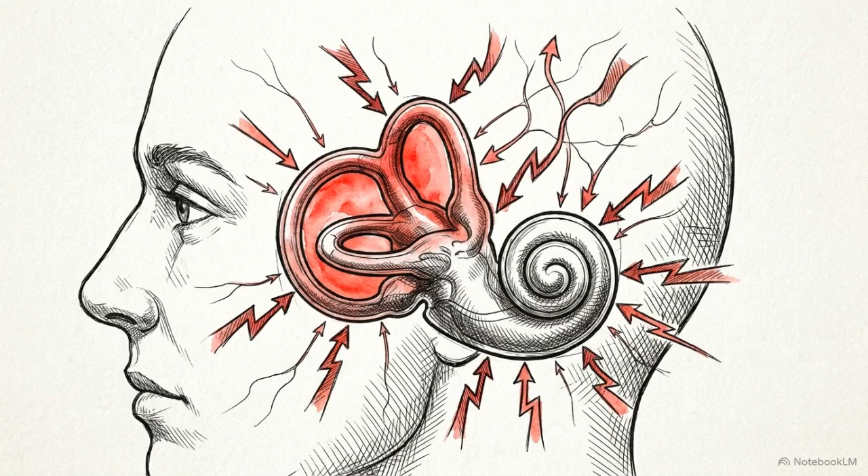Swallowed completely, the pilot is stripped of all external visual data. Without a visible horizon, human physiology fails. The inner ear actively misinterprets the forces of acceleration and gravity, feeding the brain false signals. Relying on physical sensations in this environment guarantees rapid spatial disorientation.

To survive, the pilot must learn to ignore their own vestibular system and reconstruct the exact physical performance of the aircraft purely by reading the instruments inside the cockpit.

Maintaining controlled flight in the clouds relies on three precise mechanical skills: cross-checking the instruments efficiently, interpreting the data, and executing accurate physical control. Achieving this requires dividing the cockpit into two functional categories: control and performance.

These distinct halves are continuously bridged by a rigid visual algorithm known as the basic T. Adhering to this structured framework is the only reliable method to process the relentless stream of cockpit data, keeping the pilot mentally ahead of the airplane and preventing fatal task saturation.

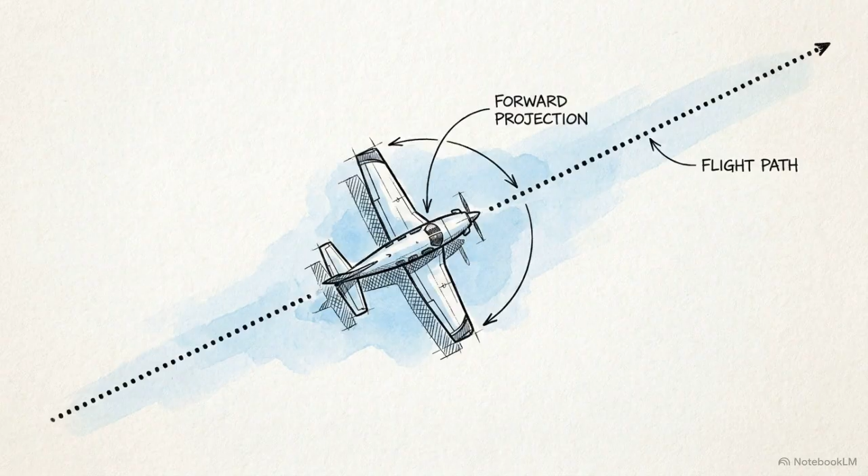Every maneuver an aircraft executes is dictated by a specific physical equation: pitch attitude plus power equals performance. Inside the cockpit, the pilot manages this equation starting with the control instruments. The attitude indicator and the power gauge represent the immediate physical inputs the pilot selects using the control column and the throttle.

Surrounding these primary inputs are the performance instruments: the altimeter, airspeed indicator, vertical speed indicator, and heading indicator. These dials do not change the state of the aircraft. They exist entirely to verify the aerodynamic results of the inputs the pilot just made on the control instruments.

Separating the panel into these specific categories prevents pilots from making the dangerous error of chasing the needles. The procedure is absolute: select the pitch and bank first on the control instruments, wait for the aircraft to react, and then consult the performance instruments to verify the result.

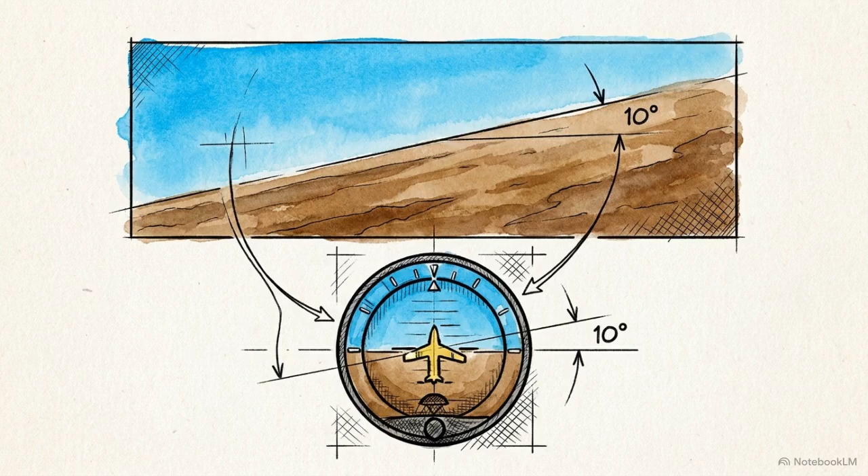At the center of this execution is the attitude indicator, the undisputed master instrument of the cockpit. Because it acts as an immediate, artificial representation of the natural horizon, the pilot must return their eyes to it every few seconds to maintain basic spatial awareness.

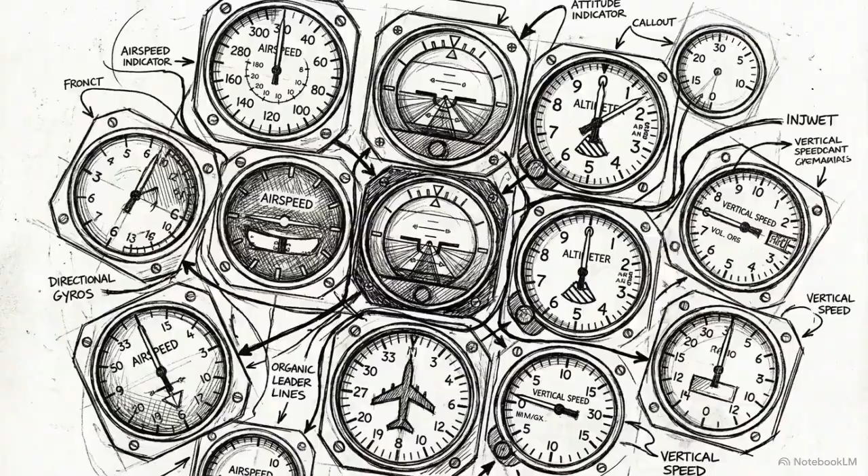However, staring exclusively at the attitude indicator will eventually allow uncorrected altitude and heading drifts. Conversely, looking randomly across the other gauges destroys the pilot's frame of reference. The solution is a disciplined visual routine known as the selective radial scan.

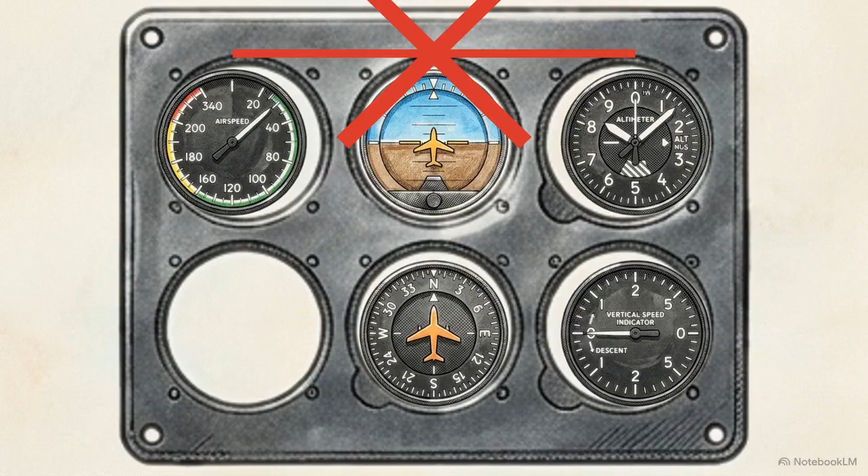The rule is strict: after checking any individual performance instrument, the pilot's eyes must immediately snap back to the master instrument. Scanning directly from the altimeter over to the airspeed indicator bypasses the artificial horizon. Because performance instruments have slight mechanical delays and display completely separate metrics, moving between them without resetting at the center breaks the pilot's spatial model.

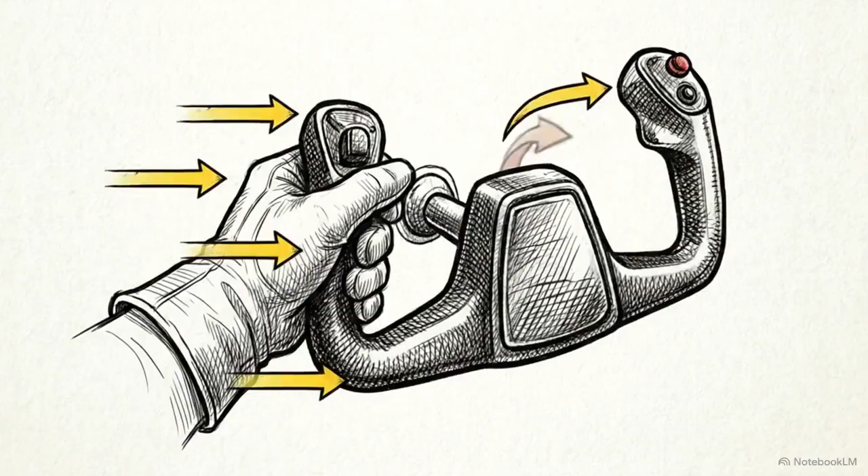The selective radial scan continually re-anchors the pilot. It ensures a constant, reliable baseline of pitch and bank while allowing systematic, rapid sampling of the specific data required to maintain the flight path.

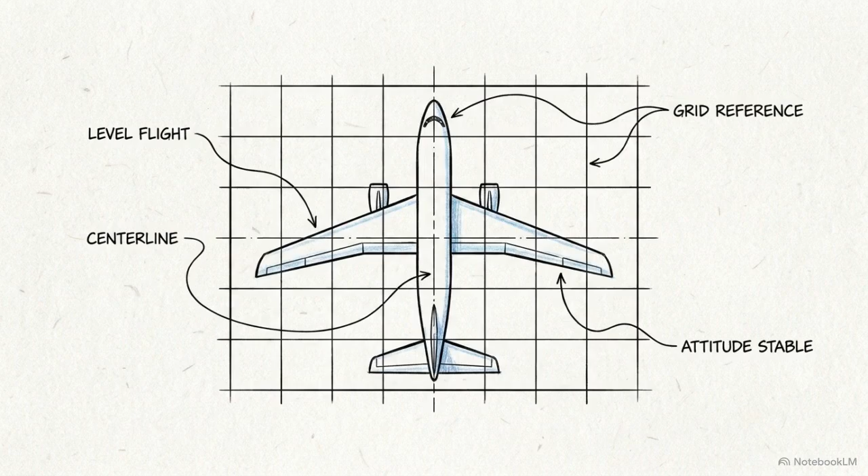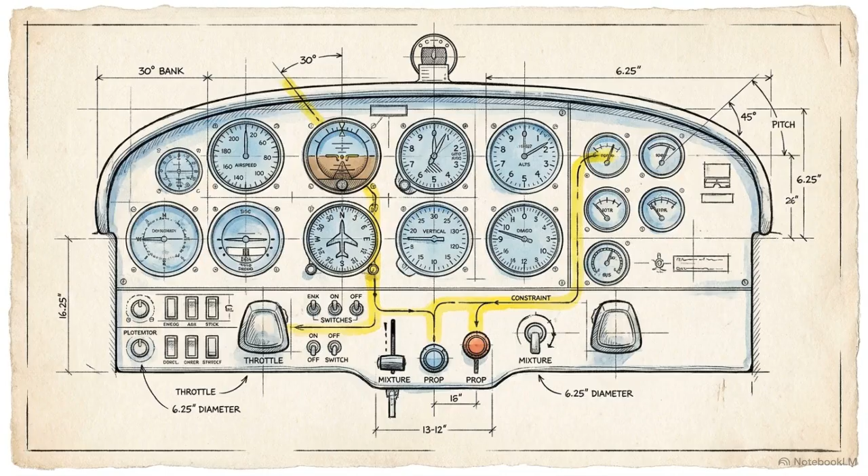This scanning technique was built entirely around the physical six-pack arrangement of traditional analog flight instruments. This specific cluster of gauges was meticulously engineered. The physical layout minimizes eye movement and maximizes the geometric efficiency of the radial scan.

It forms the basic T configuration: airspeed at the top left, the attitude indicator top center, the altimeter top right, and the heading indicator directly below the attitude.

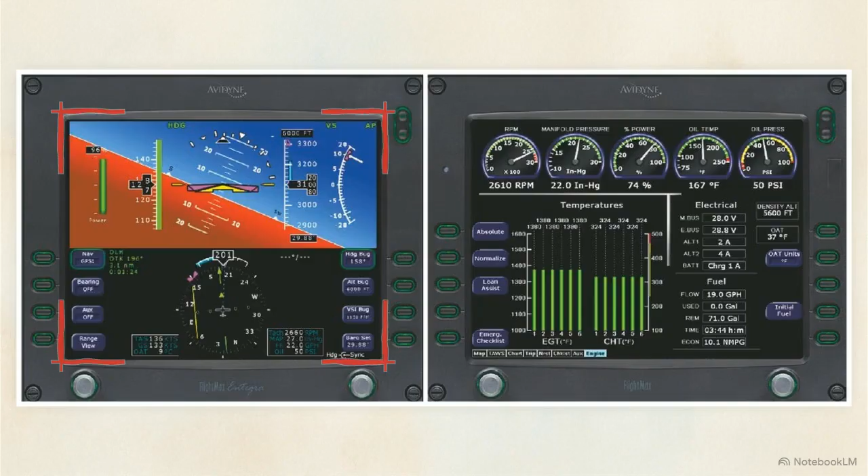Decades later, aviation transitioned to the modern glass cockpit, consolidating this data onto a digital primary flight display. Instead of traditional round dials, the digital screen presents information using vertical tapes for airspeed on the left and altitude on the right. Despite the radical difference in presentation, the digital geometry maps perfectly over the analog six-pack.

The relative positions remain identical, preserving the exact same basic T scanning pattern. The basic T has survived the transition to digital screens because it reflects the optimal mechanical path for human visual processing in the cockpit. While the geometric layout of the basic T is permanent, the pilot's attention is constantly reallocated.

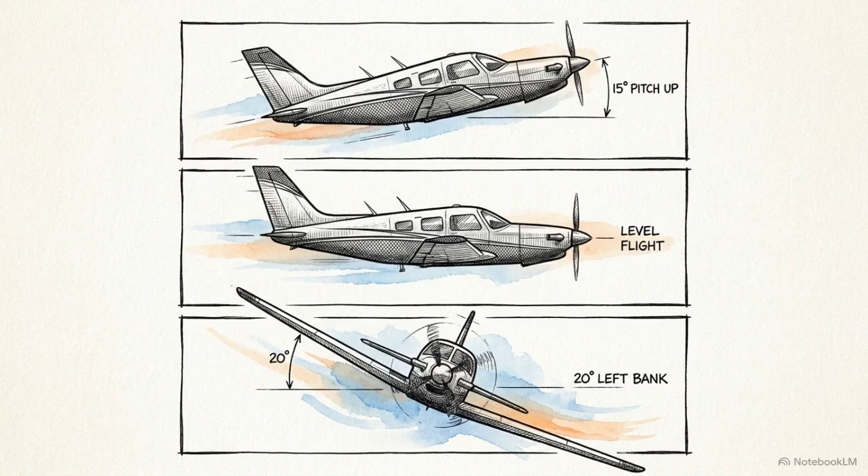The visual scan dynamically shifts priority based on whether the aircraft is climbing, cruising, or turning. During any given maneuver, one specific dial becomes the primary performance guide, the exact instrument that dictates the pilot's next physical control input. Consider the climb.

With the throttle locked at maximum power, the airspeed indicator takes priority. It becomes the primary performance guide used to verify that the pitch attitude is correct. If the airspeed reads too low, the pilot makes a deliberate correction: lower the nose on the attitude indicator, let the aircraft physically settle, and recheck the airspeed.

Once the aircraft levels off into cruise flight, that priority hierarchy instantly shifts. Now, the altimeter takes over as the primary performance guide for pitch control, dictating minute adjustments to the nose to maintain level flight. The airspeed indicator is demoted, functioning solely to dictate adjustments to the throttle.

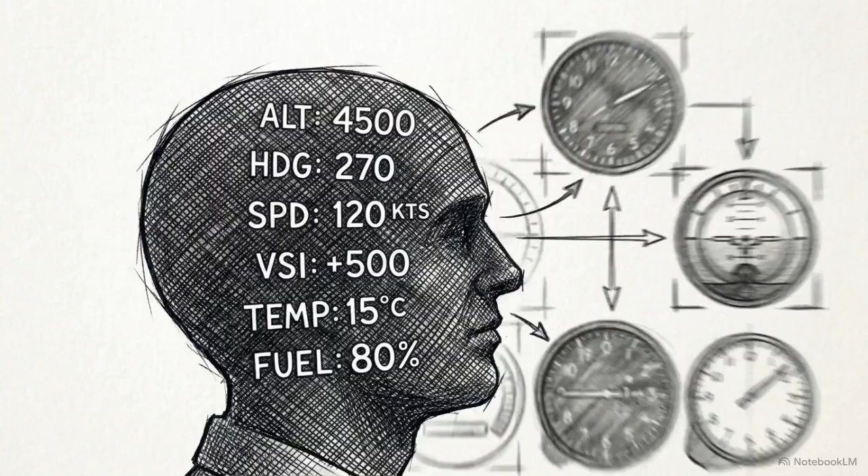By selectively reassigning importance to the instruments based on the immediate flight profile, the pilot filters out unnecessary data, ensuring they are only reacting to the exact metric that matters at that moment.

This entire methodology culminates in the continuous execution of straight and level flight inside a cloud. The pilot is locked in a tight, mechanical feedback loop: execute a control input, run the radial scan, verify the aerodynamic performance, and make the next micro-adjustment.

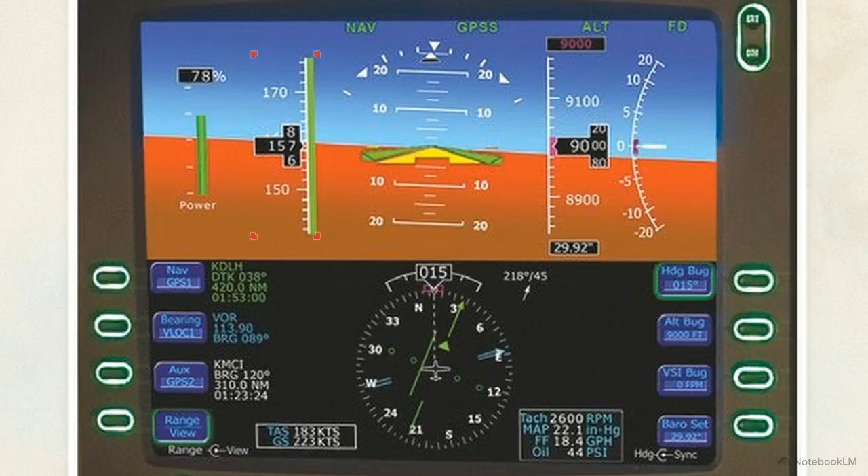Verify the attitude in the center, drop down to check the heading, correct the wings, snap back to the center, dart over to the altimeter, correct the pitch, back to the center, check the airspeed, adjust the power. This disciplined, rhythmic sampling of data prevents the pilot from falling behind the aircraft.

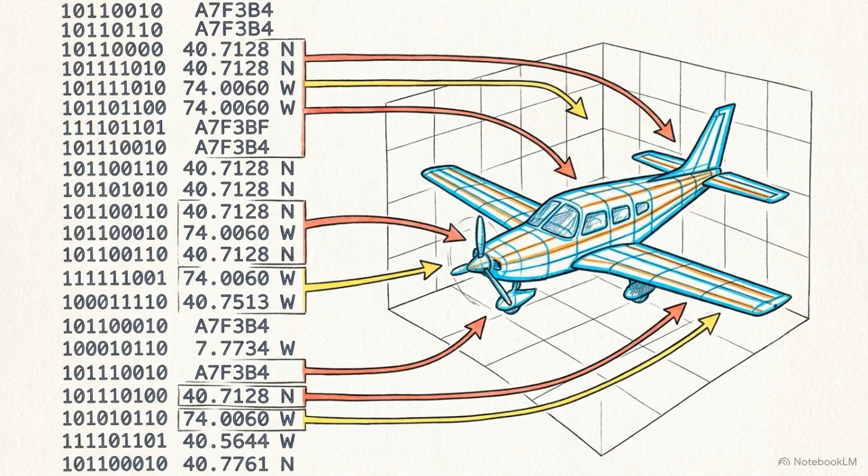By executing the basic T efficiently, raw numerical outputs are continuously translated into a perfect spatial model, allowing an aircraft to navigate safely through zero visibility.